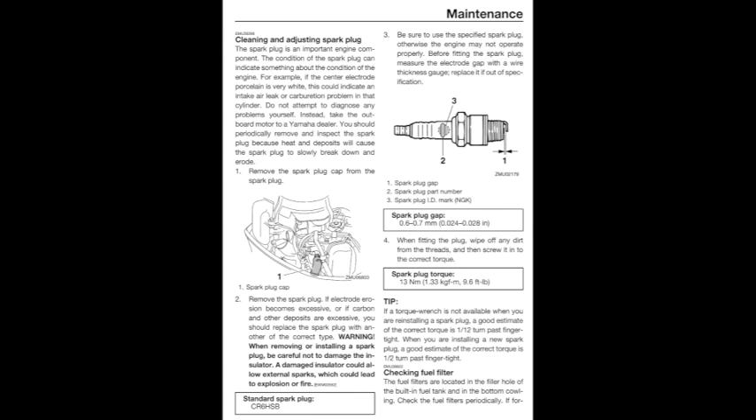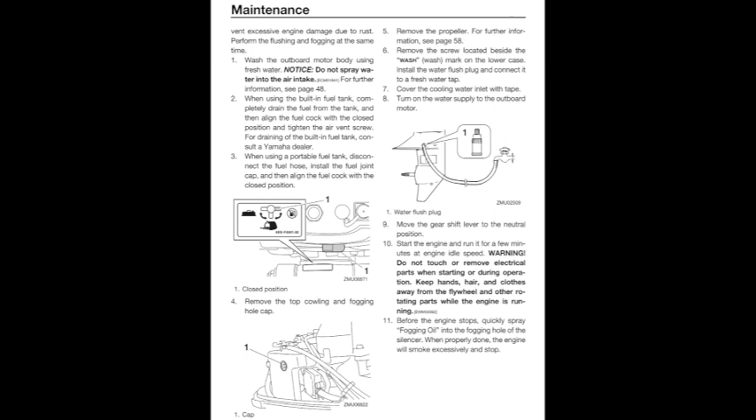The next thing you need to know is what the spark plug is, because you're going to change that, aren't you? You'll also need a way of flushing the engine, either with earmuffs or with a dedicated tool. You'll also need to go carefully through the schedules of maintenance and decide what it is you're actually going to perform. We don't use the earmuff type flushing tool on our engine. We simply took an M8 bolt and drilled the centre out of it so that it fits into the flushing hole. This way we can attach a hose pipe to it.

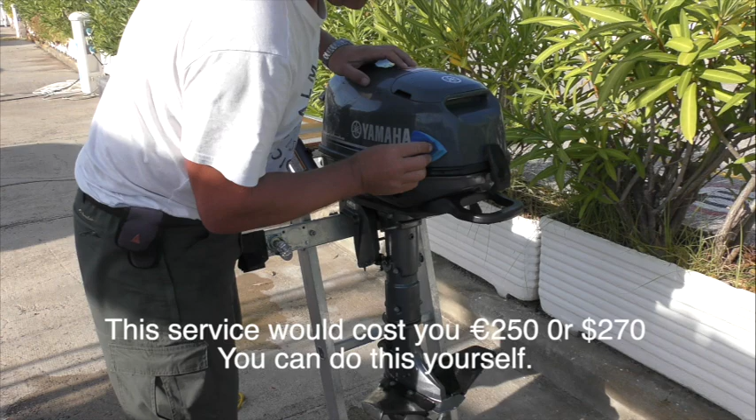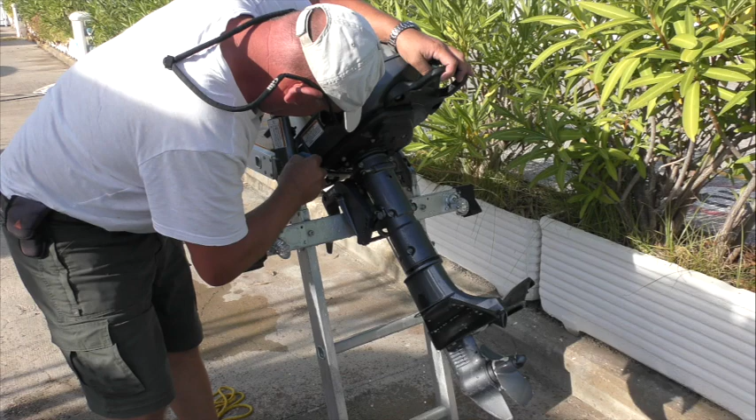Simple. We always start by cleaning the engine off with warm soapy water to get rid of all the salt deposits all over the engine. This includes removing the hood or cover and washing that as well, both inside and out. Make sure that you get to all those hard to get to areas, up under the base of the engine and around its mounting brackets, etc. It's really important. If you have hydrofoils, then it's a good idea to take them off and clean behind them as well.

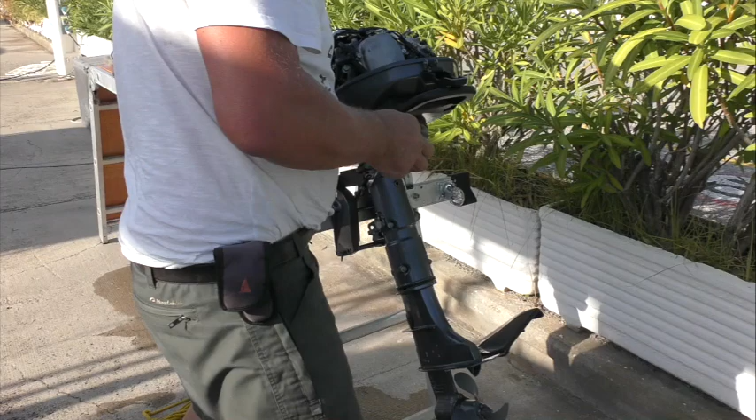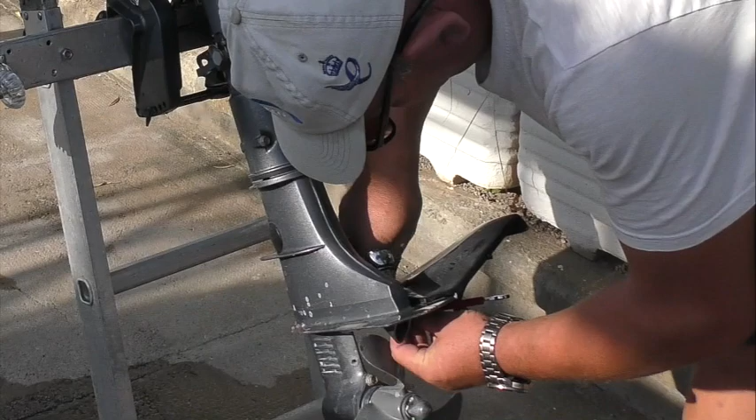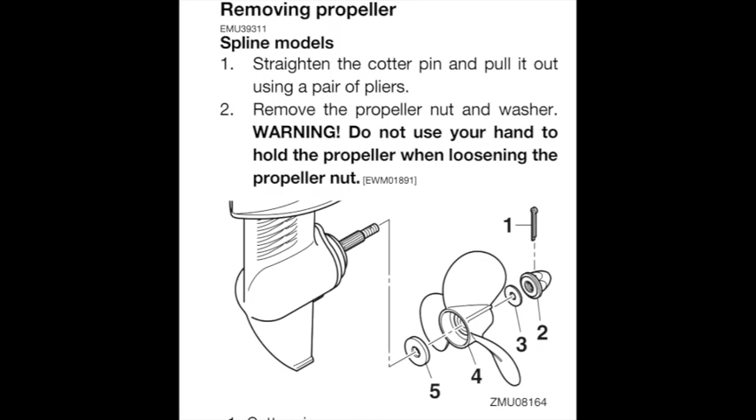Once you've done this, you can then carefully remove the propeller. Pay particular attention to the order in which the washers, the propeller, the cotter pins and the spinner cone come off. This is covered in your manual though. Check and clean all the parts that you've removed and then put them on the table in the order you took them off. Your manual will show you the order in which the pieces go on or come off, and you should replace the cotter pin in part number 1 whenever you do this.

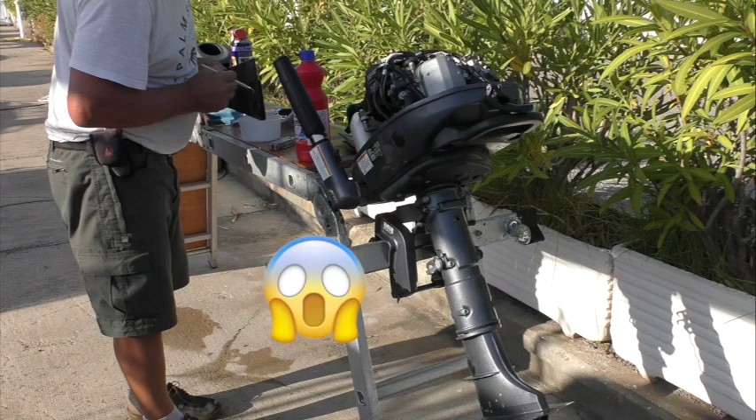If you've got barnacles or sea growth on any parts of the lower engine where it's been in the water, you can use muriatic acid to clean them off. You should really wear gloves for this. So before the health and safety police come round and arrest me, yeah, I know, I'm not wearing gloves and I've got short trousers on. I also use muriatic acid on the lower part of the leg. It just saves a lot of hard work. It doesn't damage the paintwork. Just rinse it off afterwards. Be sure you rinse it off.

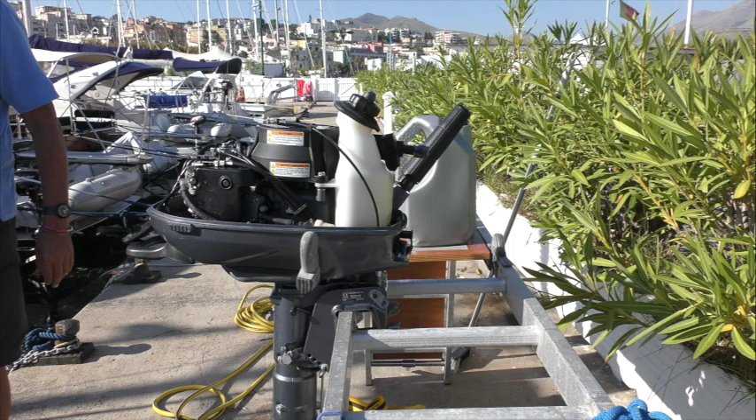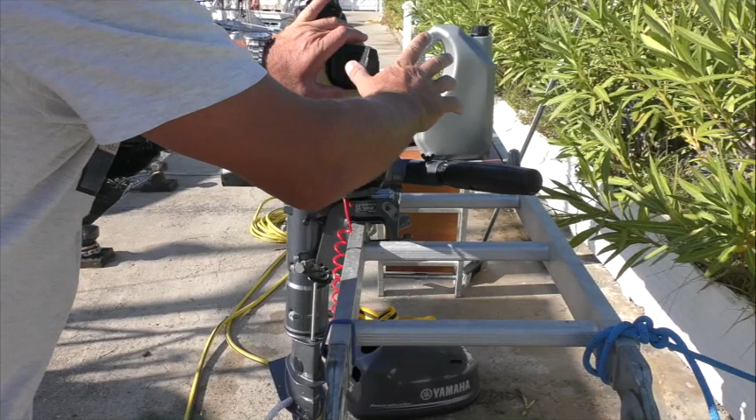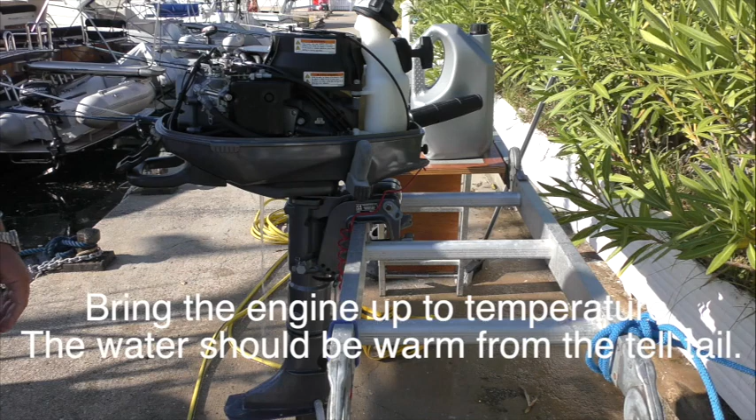David on our buddy boat Eternity has the same engine, so he decided to watch what we were doing. That's your adapter. Our adapter. Excellent. A 6mm bolt with a hole in it. What I'm going to do is... that's it. The next thing to do is to flush the engine through with clean water and bring it up to temperature. It's ticking over a little bit fast, but that's nice and warm now.

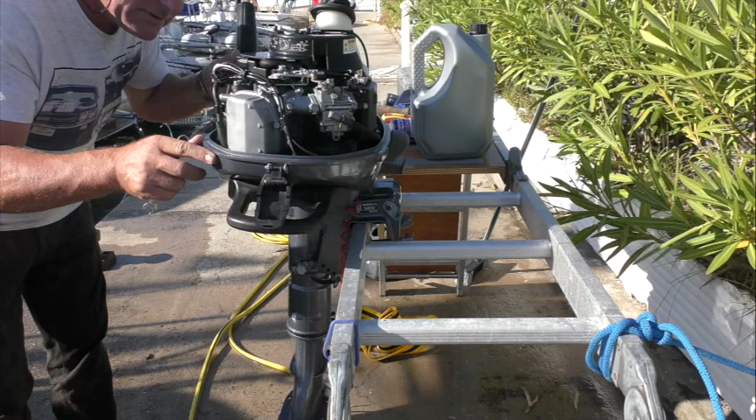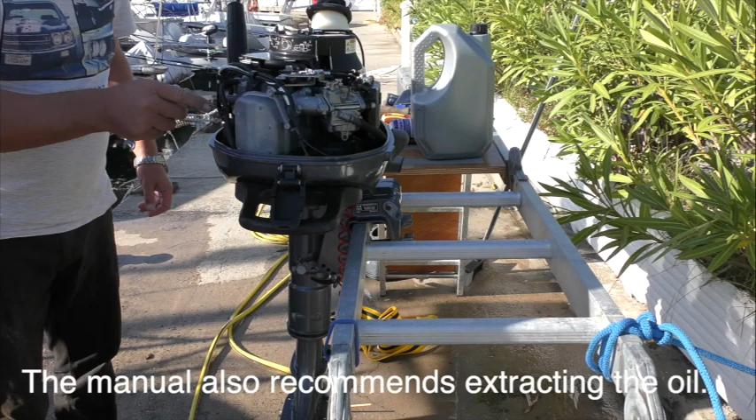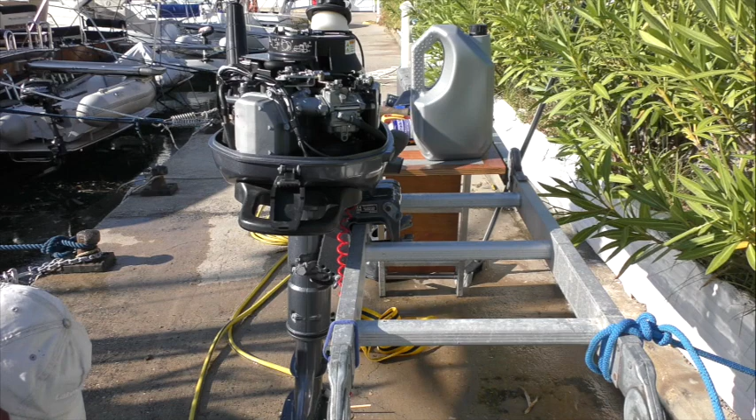I'm going to let the oil drain down. There it is, at the back there. That's the drain plug, the one with the little copper washer on it. Yeah, but then it's going to fall in through the casing, isn't it? Yeah, and we'd have to go in through there. So all we'll do is put our suction down it, going to take the oil out without making a mess. Okay, David, do you want to pump away? I do.

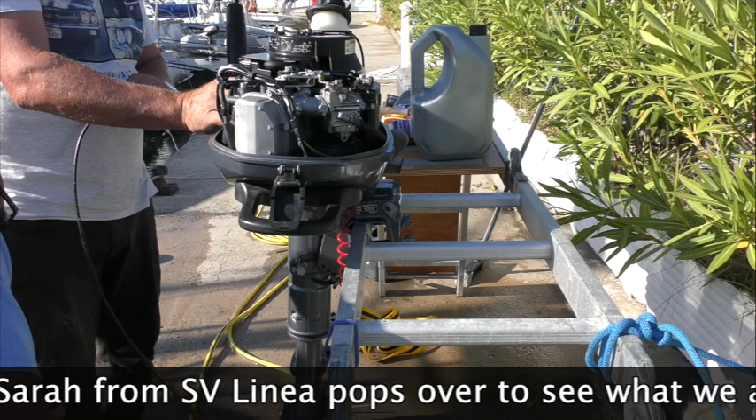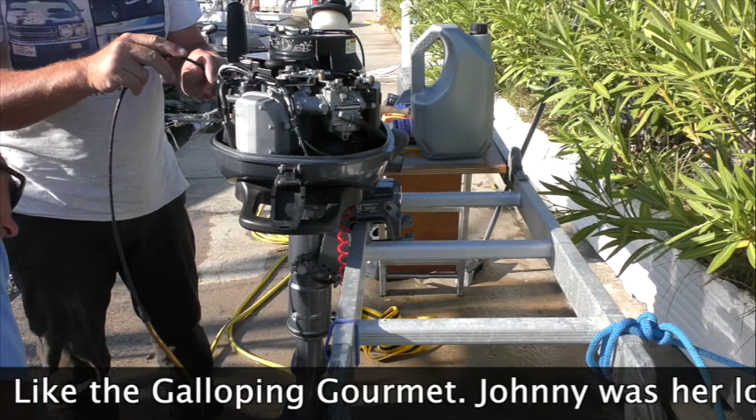I'm the apprentice. You're Johnny and he's Fanny, so to speak. Yes. My uncle used to be her chauffeur. Really? Yeah. My uncle Chris was Fanny Cradock's chauffeur. Yeah. Small world, eh?

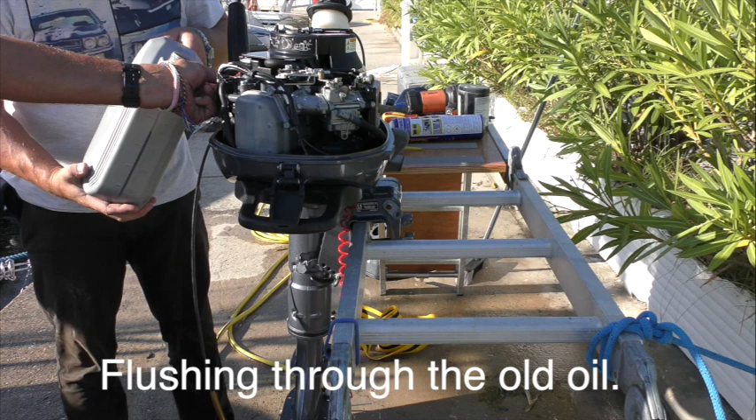I think that's it. Happy with that? Try a bit more? Yeah, let's try a little bit more. Okay. Right, so we've got the grade of oil suggested, 15W40, and what I'm going to do... Hold on, I've got just the thing for that. I'm just going to pour... You pour it gently though, because I haven't quite got the angle of dangle. So I'm not filling it up, all I'm doing is just going to flush out the bottom while the engine's still warm. Yep. Okay. Tell me when. Okay.

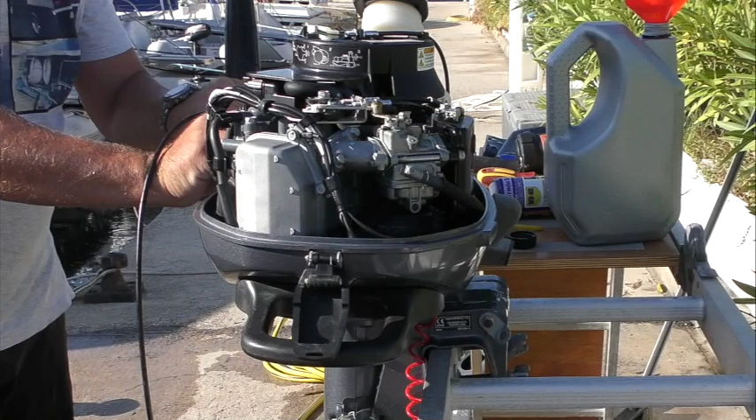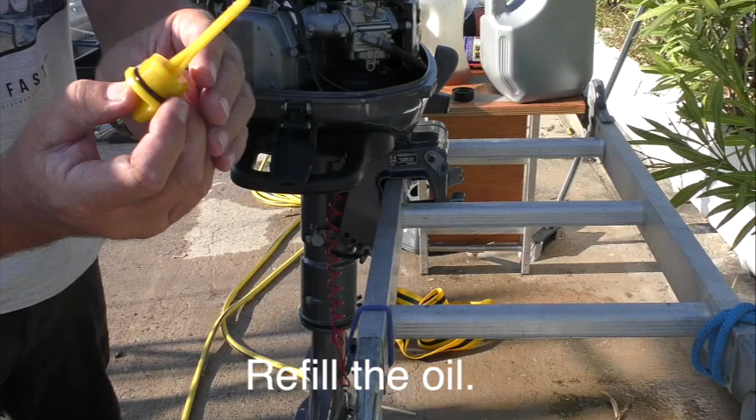So any muck or dirt or dirty oil that we couldn't get is now coming out. It's between the top and the bottom mark, which it is. Don't know if you can see that on the camera. That's about right. Well, it should be, that's what it says in the manual. While we've got the spark plug out, we'll replace that.

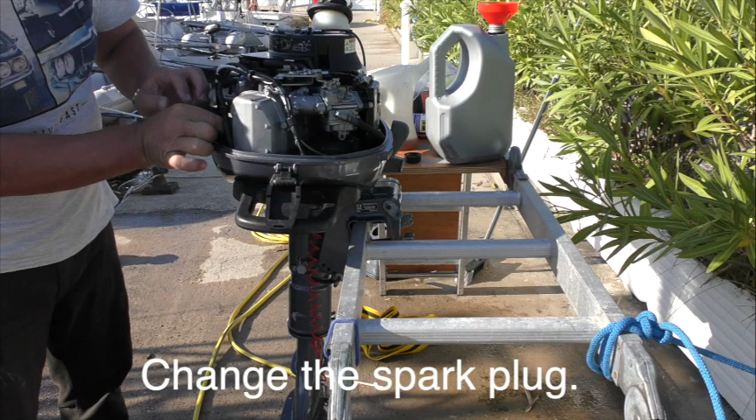Have you not checked the gap? They're preset, so they set them in the factory. Yes. What they do is you have a little cardboard tube, so that in transit the end of the thing is protected. I wondered what that tube was for.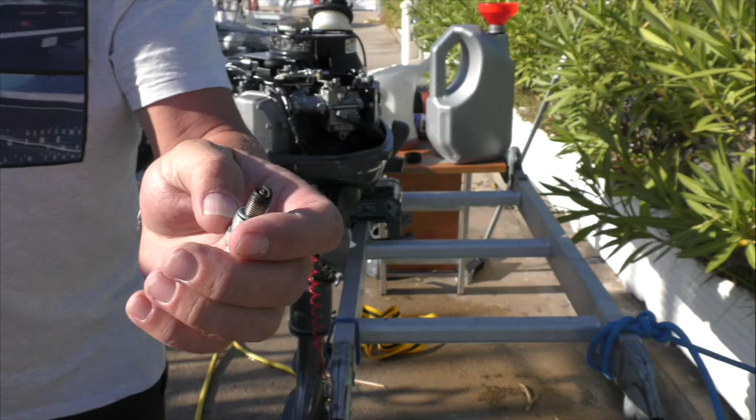It's an aluminium head, so just the tiniest kind of pinch. I think it's 13 Newton meters, but there's a little compression washer on the spark plug when delivered. You see how it's like two washers together? See that on there? So what happens is that compresses. That's fine. Okay, so we'll keep that spark plug as a spare.

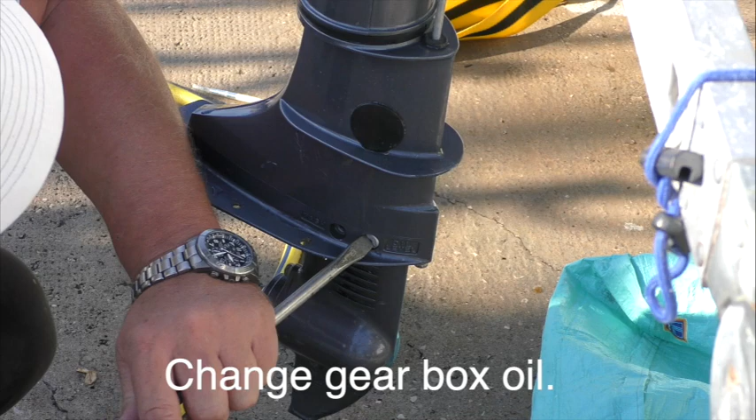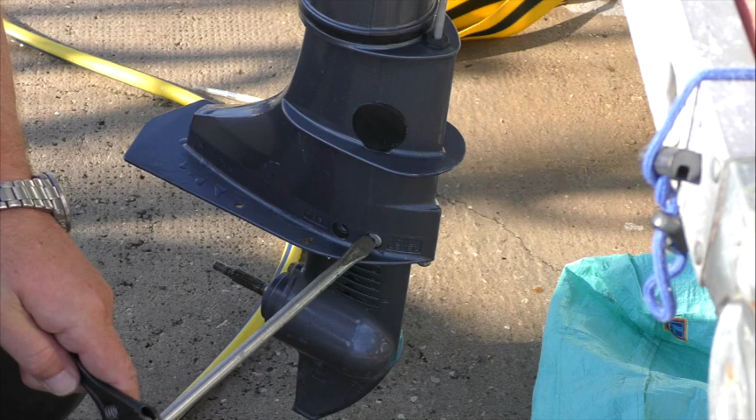So there's two little screws, and they're normally pretty tight. But you get this crescent wrench on there. There we go. Now I've got something to catch it in. I'll grab the bucket. So the top one there is basically where you fill it to, the oil level. So at the moment it's full of oil to here. Oh, it's the bottom one. And the bottom one is the one.

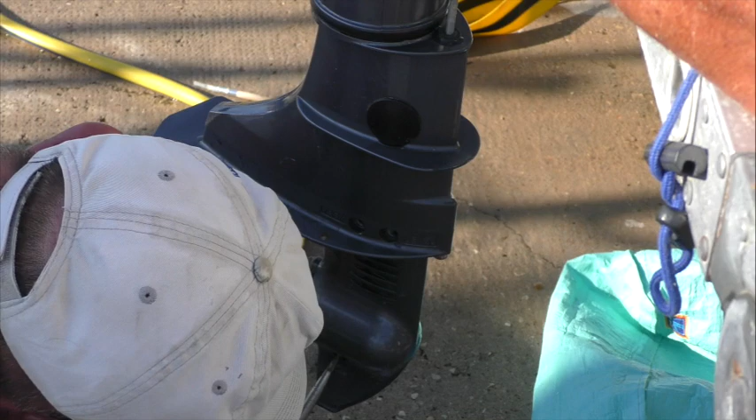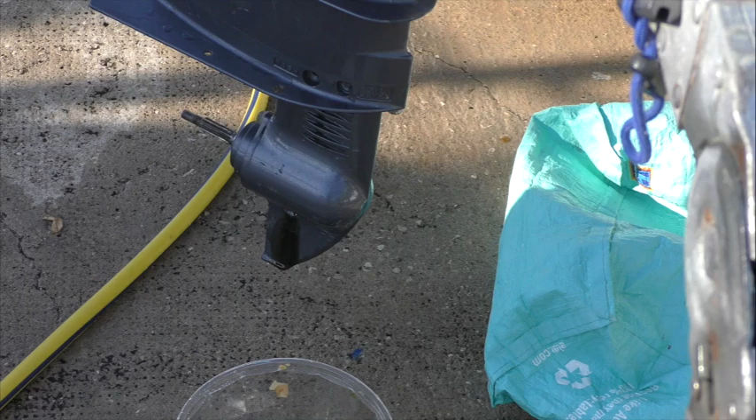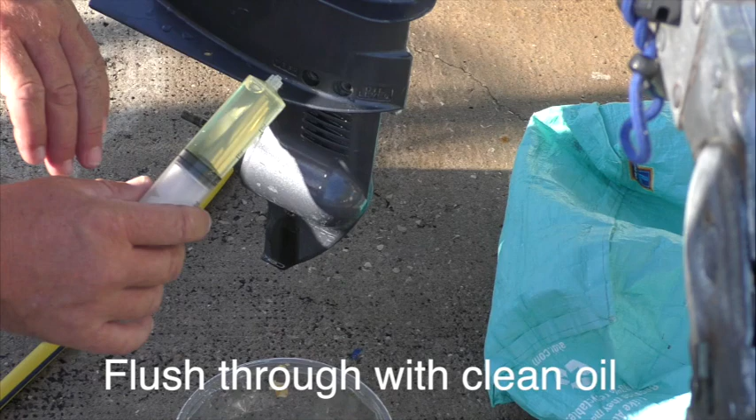Let me just hold the trestle. Just a gentle tap. That's the one. Well done. Okay, what I'm going to do now is do the same, flush it through with the gear oil, which is on the boat. You're going to flush it through, so that any gunk again comes out. I'm just going to put the clean oil. The nozzle's not long enough. Okay, hang on.

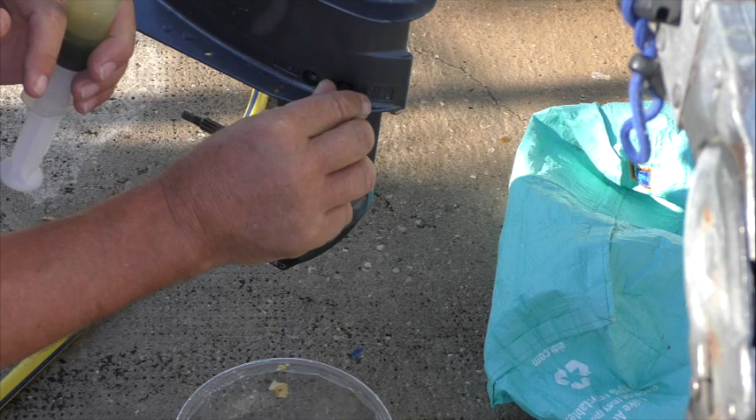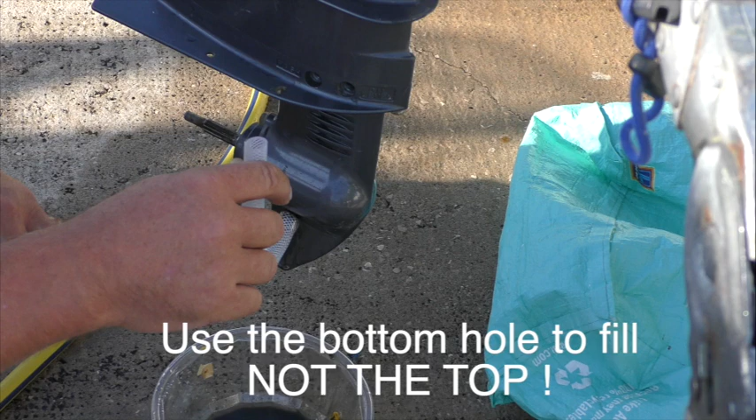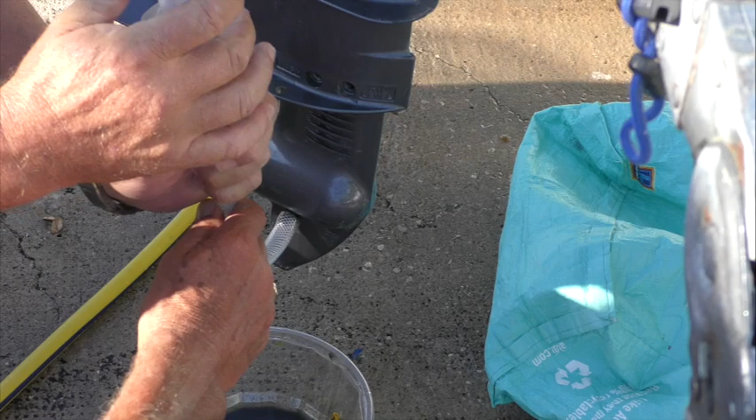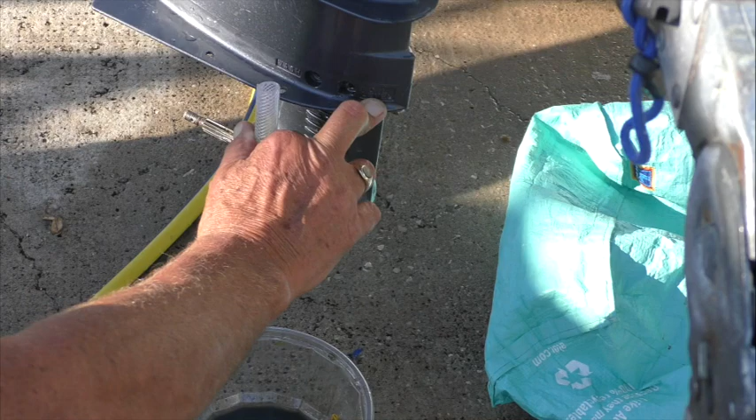It's M8, the same size as the... Yeah, but will you be able to get it through the small hole? There we go. And then we just put the oil in until it comes out of there. Are the capillaries wide enough just for gravity to work? Yeah. There we go. You can't overfill it, can you? No.

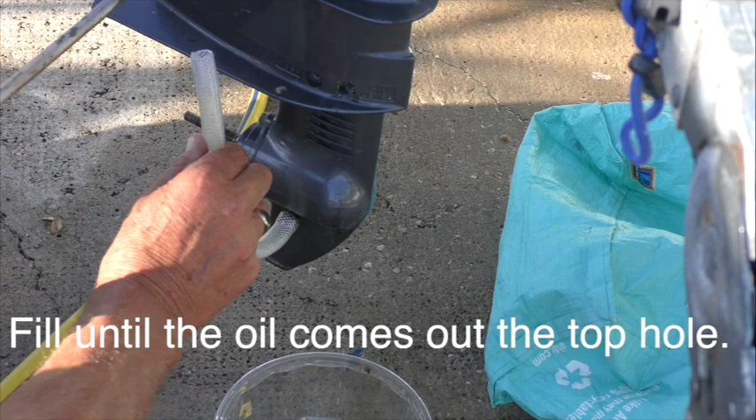Right. So I've got to do two things fairly quickly. One is to put that back in there. You ready? It's not moving. Oh, it is now. You ready? Go.

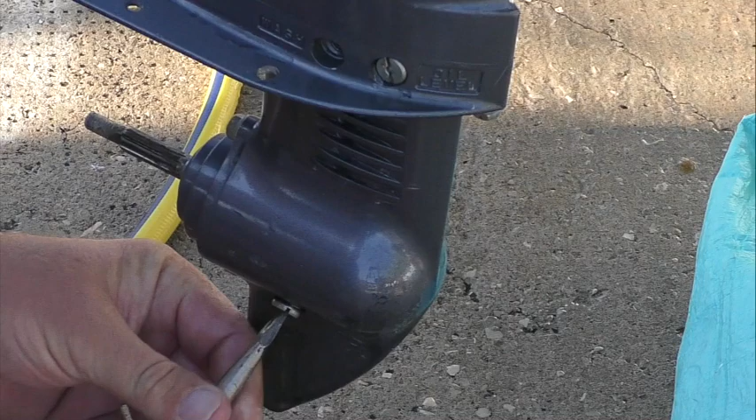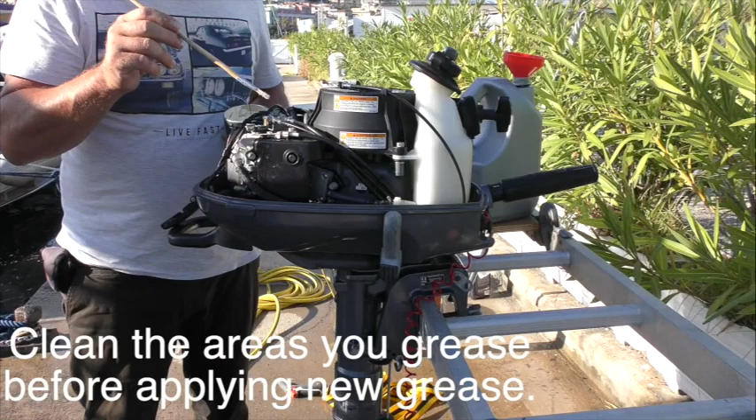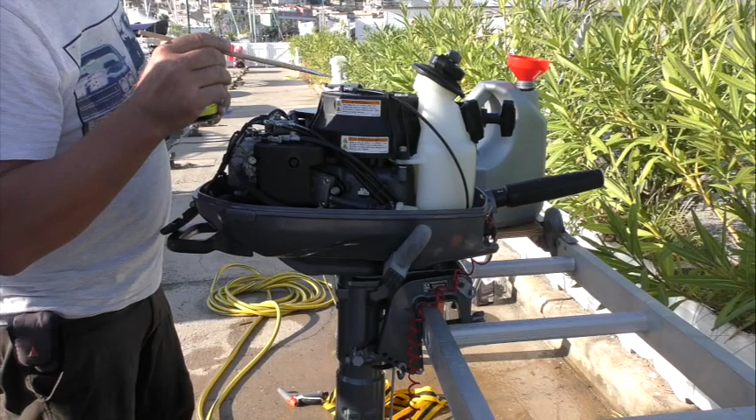There's only linkages and cables. So you've got push-pull on the throttle. Then you've got the carburetor actuation arm, and the spring. And then this is the choke cable. So that's the only things in there. This one here, put a little bit on that, is an interlock for the gear. If it's in forward or reverse, it stops you from pulling the starter wire.

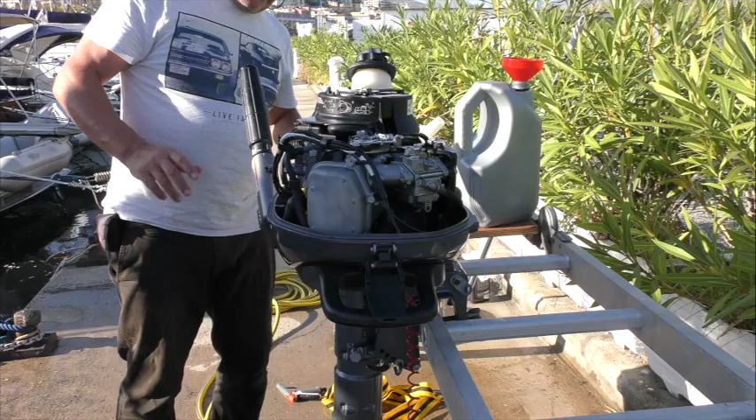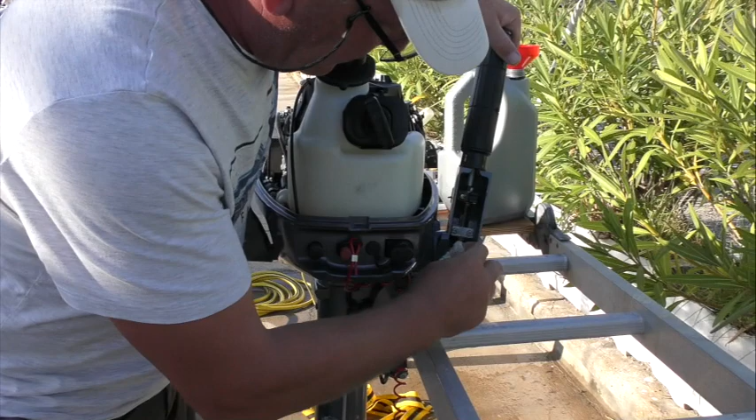That's that job done. So the next thing is our throttle cable and our tilt linkage, etc. So in the bottom, if I turn it around that way, on the underside of there is that throttle cable. I'm just going to wipe off the old grease again. Again, you don't need loads.

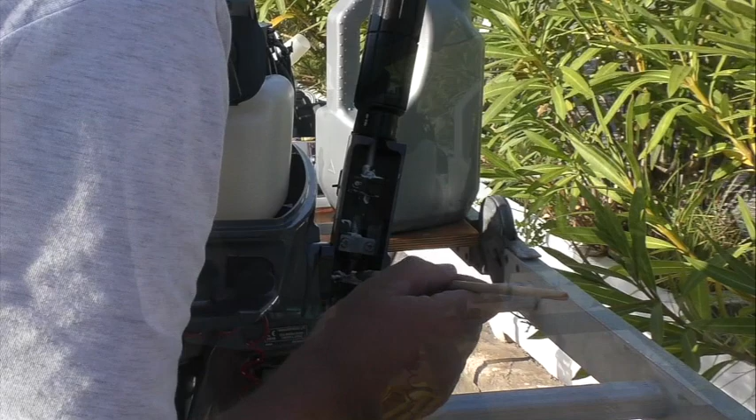And you'd pay what, 250 quid for this service at a Yamaha dealer in the winter, and you can do it yourself if you have the confidence. It's just going through. Read the manual, obviously, but then just work on things. I always do the oils first, and then work my way down the engine. So that's the top done.

Next thing is there's a fuel filter in here, David. I don't know if you can see that. Is that an inline filter? Yeah. So there's two. There's one in our remote tank and one for this little tank. And this is the bulb. You can see it pulling the fuel through. Because it's clear, you can see that it's nice and clean.

But should you need to take that fuel filter out, it's presumably just a simple inline mesh thing. Do you buy the whole unit? Yeah. And what you can do is that unclips, and then you turn the fuel filter. The two pieces come apart, and then you can just clean it out. But you know how particular we are with fuel.

Now we're going to leave this full over winter, but drain the carburetor. So once we've finished lubricating everything else, we'll start it up. Then we'll turn the fuel off and run the carburetor dry. And this is the carburetor here. And at the bottom there, there's a little drain screw.

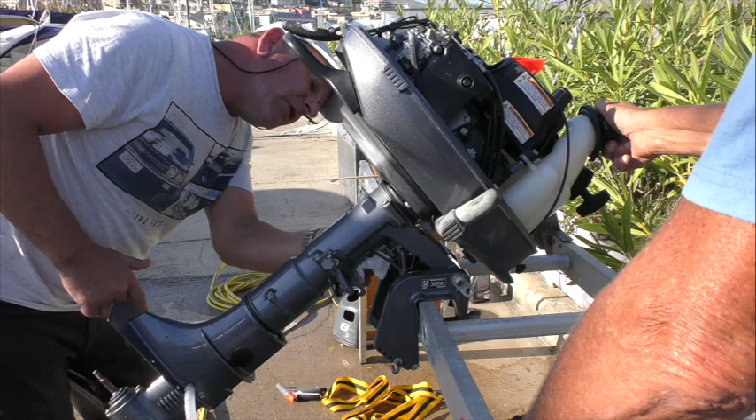So you don't actually have to run it dry. You can drain it from there. You can, but I like to suck everything out of the pipes, so you don't get any sort of crystalline in the pipes. Exactly. So under here, there's a couple of springs that hold that ratchet in place. You need a bit of grease on the pins.

I don't know if you can see it, there's a grease nipple there, which is for the gear. Have you got your grease gun with you? I've got my grease gun with me. It's in the toolbox. Right, so that's cleaned off. Now this, it says specifically in the manual that you need to do that, which is the engine lock, to stop it swinging when you try this on the dinghy.

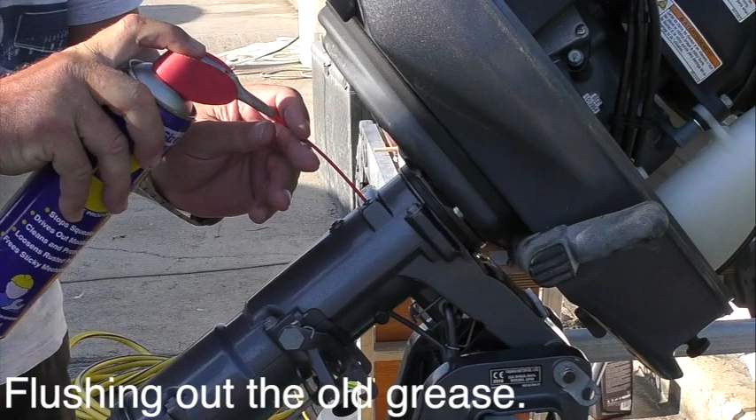But you don't know if you grease it through the holes whether there's already any dust in there or grit in there. Well, I'm going to show you a trick. Before we put that clean one back in, if you can hold that, what I'm going to do is blast it through, like that. And now it's coming out the hole that this goes into. So you would hope that that's got rid of any grit and stuff. It's just flushed it out. Yep. Top tip, Ant. Top tip.

All the things I've seen over the years, probably the most damaging is people greasing things up and not cleaning them out, so leaving the grit in there, and then it goes round in the bearing, scores the bearing, and then you've got a big job. So then we're going to do all of those that I've just cleaned, and then we'll go back and do the

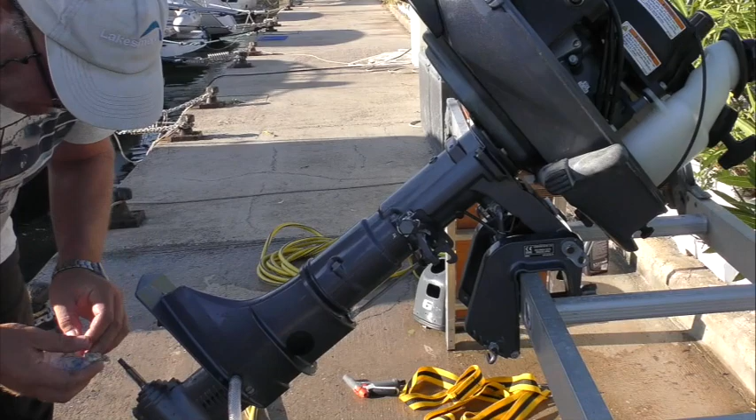grease nipple. Right, the next thing I want to do while I've got a piece of rag here is just to clean off this shaft with some WD, because I'll use this as well, because this is an oil rag. And the only reason we've taken that off is so that while we've got it out, you're not spraying water everywhere, or cutting your legs. Where's the anode?

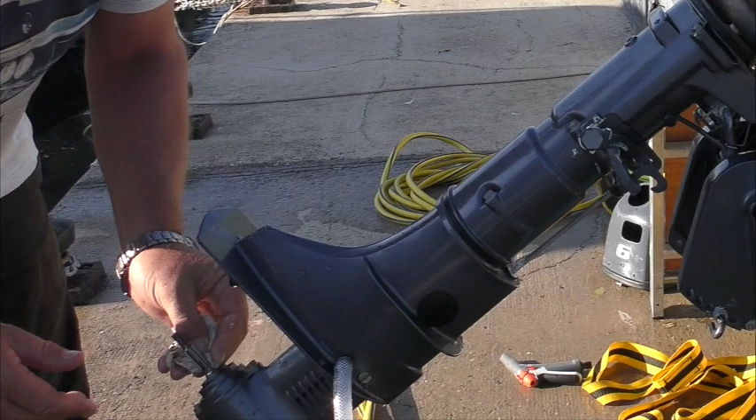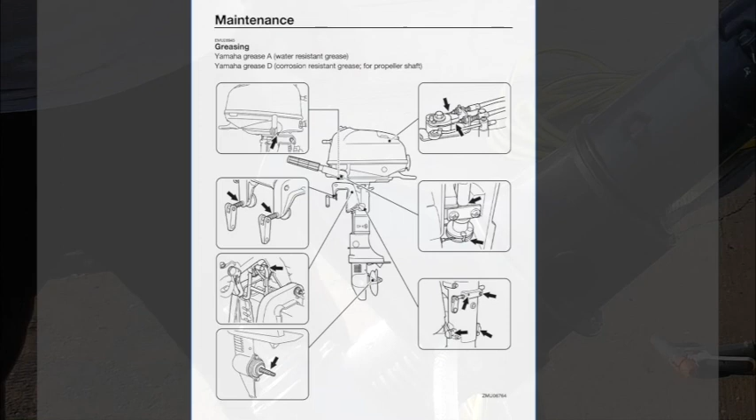Right, the anode is that piece of metal there. Right, and that looks about 7/8 still there. Yeah, it's not bad, is it? That's all right. So all of the grease points that we've mentioned here are covered in the Yamaha manual. Your manual should cover your engine as well if it's a good one. Grease nipple there, David, with the grease gun.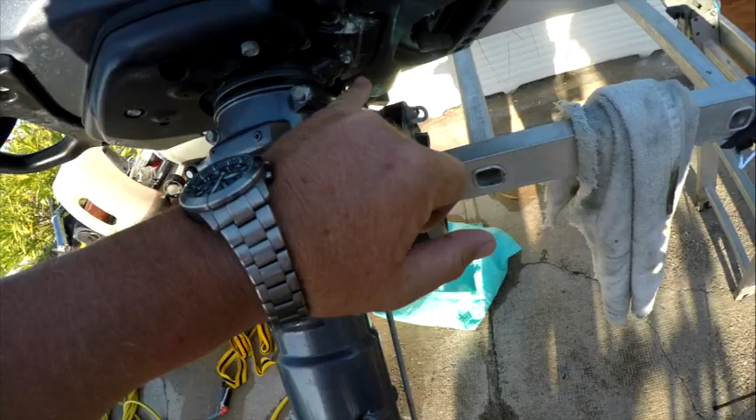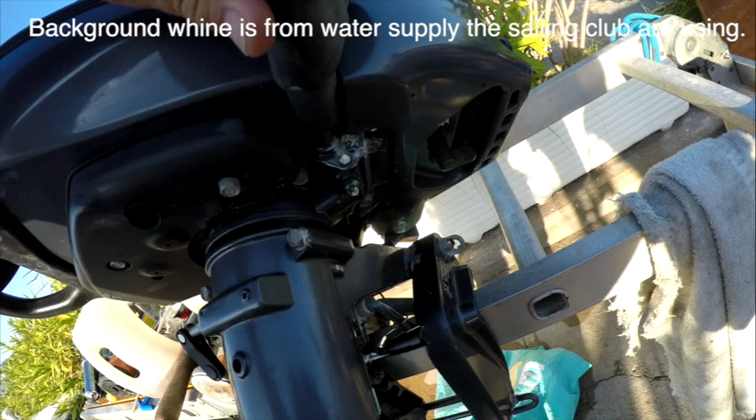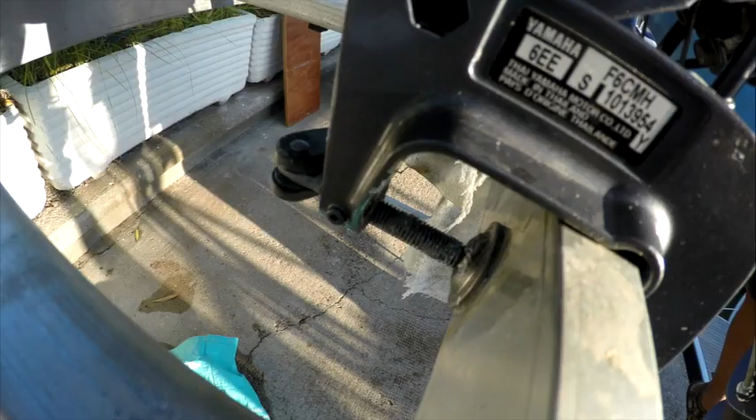With Grandad's trusty grease gun, and the grease has come out of the ball and the indents there, so there's plenty around that. And then we've cleaned off the bracket screws with WD-40 and just greased those. That's those bits there. So the last thing we've got to do is to clean this off with WD-40, which I've just done, and then put the propeller back on. Got to grease the spline. We grease the spline, and put that back on.

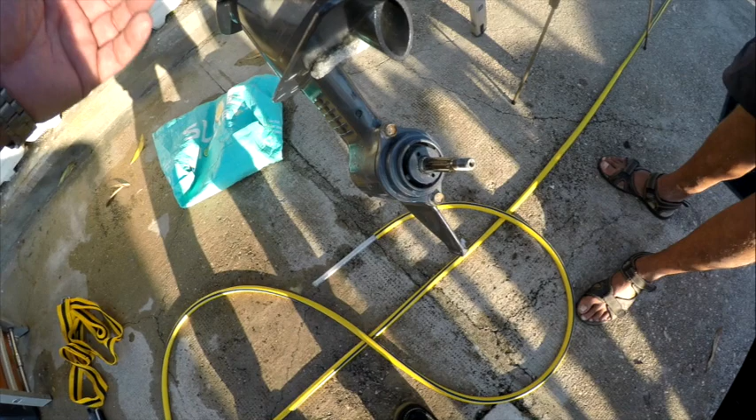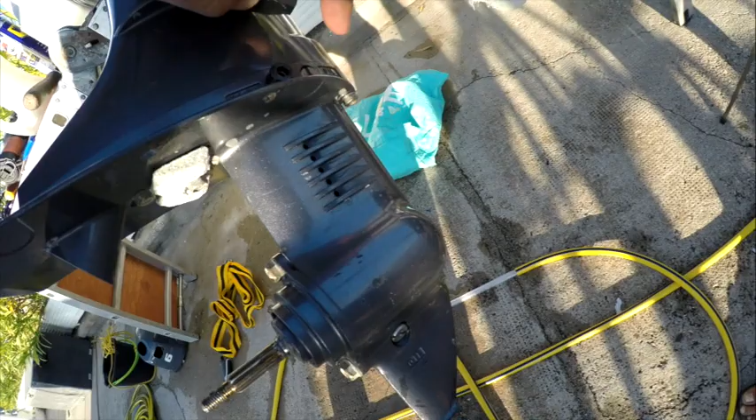And there's a bearing in there, is there? There's an oil seal, a lip seal in there. And there's a bearing at the back here, and a bearing at the front, and then there's two helical cut gears in here which change the rotary motion from vertical to horizontal. And they're lubricated by the oil that we've put in here, because there's the drain plug. That's all full of oil, so that's lubricating those.

And the whole point of pushing that oil up, rather than filling it from the top, is that oil's really viscous. It's EP90. What happens is if you fill it from the top, you may not fill the whole gearbox. And then you've got an air lock in there or something? Then the air gets hot and expands. And it doesn't need to get very warm to do that. And then start damaging the seals. It will then blow the seals out the back here.

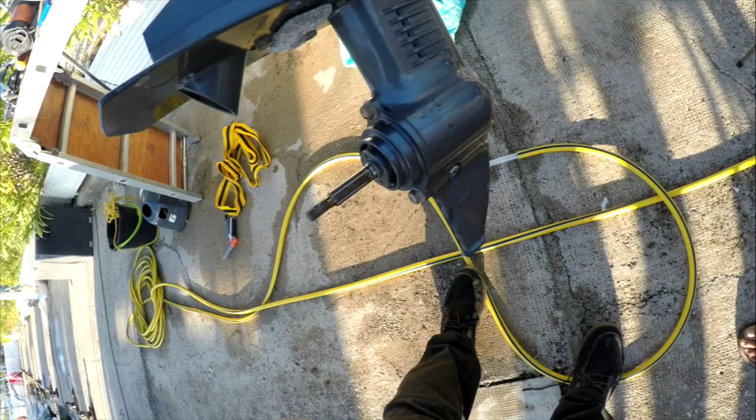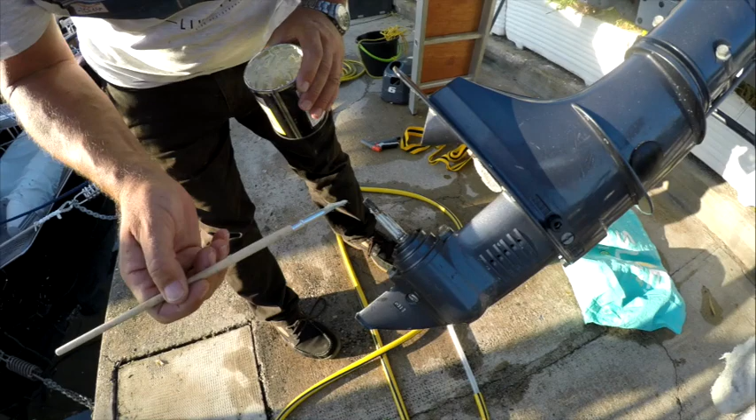So we've still got to change that's the wash plug. We've got a plug for that on the bench. So again, we don't go mad with grease. Just protect that. Like so.

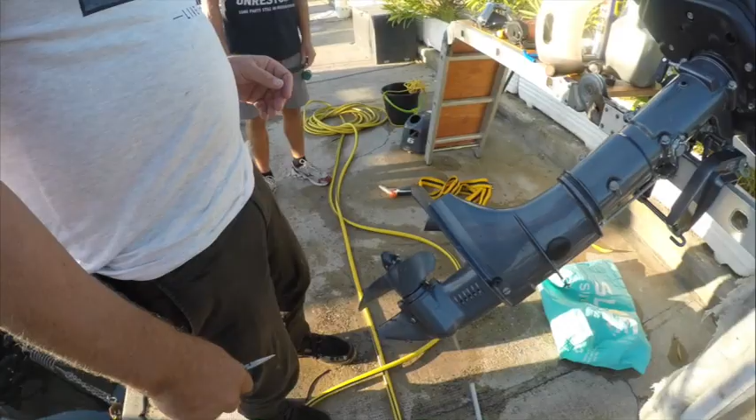Are we done? That's it, done. Turn this off? How do you turn it off? You push.

Hi folks, well I hope you've got something out of this video, a few tips and tricks. It's not the definitive way to do an engine service, but it's the way we do it. Fogging oil, we're not really fans of fogging oil. We prefer to put a teaspoon of clean oil down the bores and just turn the engine over, and that coats the rings and the bores with clean oil, and then the engine is okay for storage for 6 months or so.

The other thing we were going to talk about was valve clearances and changing the impeller. Now, changing the impeller means that you actually have to disassemble the leg of the motor, and that's quite involved. And doing the valve clearances means you need to take the rocker box cover off. Now, that would take us another 20 minutes just to do a video on those two things. So when we do ours, we'll do that video and show you how we do that.